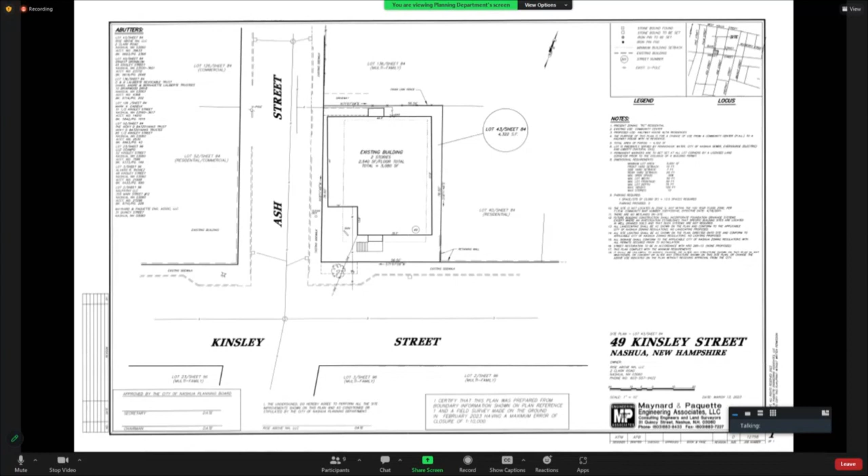I'm Michelle Clark. I run Process Recovery Center in Nashua and Rise Above Sober Living. The plan is a 28-day residential program. It'll be for women, housing up to 15 women. We'll have a clinician on site, a case manager on site, and 2 behavioral health techs during the day. The second shift and third shift will each have 2 behavioral health techs on at all times.

From there, they will transition on to PHP or IOP. So they will still be in the community, but they won't be at 49 Kinsley. There'll be a nurse that comes in and sees them during the day. So they'll have clinical services, case management services, and nursing services.

Questions for the applicant by the board? Ms. Harper: I'm sorry, just to clarify, this would be the initial step in someone's rehabilitation? Absolutely. Okay, thank you. Other questions by the board?

The only step they may do before us is like respite or detox, because we're not going to have a detox or the social aspect of social detoxing like the respite in Nashua. So they may do that first.

Thank you. Other questions by the board for the applicant while we're in the hearing? Mr. Riley: I guess just to follow up on that, then, would you have any state licensure from the Department of Health and Human Services, or are you outside the scope of that?

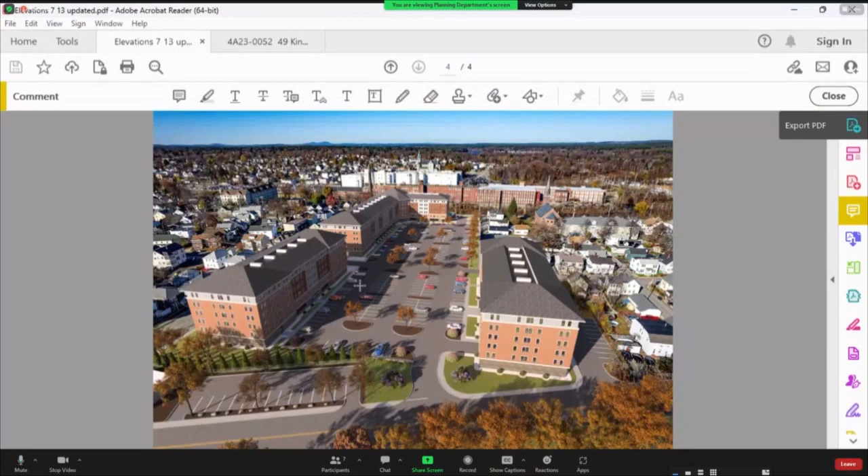I had an aerial photo of just the existing site, but I'm sure you're all familiar with it. So 103 Temple Street, map 37, lot 6. It's about 5.8 acres, located in the general industrial and TOD overlay districts.

Direct abutters, we've got Temple Street, retail uses and railroad property to our north. Spruce Street and residential uses to our west. We've got Scripture Street, Worcester Street, and residential uses to our east.

To the south, we've got Howard Street, St. Mary's Bank, there's a Wendy's, fire station, and city-owned land. Predominantly residential, but there are some mixed uses throughout this area of the city, as this board is well aware.

Existing site is currently developed, so there's a large building complex totaling about 118,000 square feet, mostly one story, but there is a portion of the building that is 3 stories directly adjacent to Scripture Street.

Historically, the site was the location of the J.F. McElwain Shoe Manufacturing Company dating back to the 1920s. Scott, as always, did a fantastic job in outlining some of the historical aspects of the project, including a link to a pretty cool video from 1923 showing the operations back in the 20s.

Current uses on site, there's a mix. We've got a contractor's yard, a kitchen store, a tire repair, sales, church, a shelter, along with the bingo hall. We've got about 2,000 feet of frontage and a total of 8 different curb cuts that go out to the various roads abutting this site. There's also various loading docks and parking areas, some of those directly out into the roadways, and then of course there's a large parking field in the southerly portion of the property adjacent to the bingo hall.

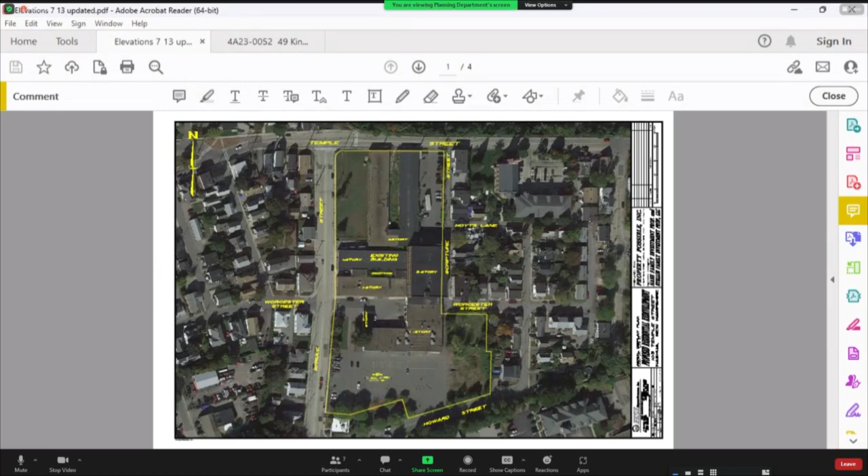Next slide, Scott. Thank you. So it's proposed to demolish the existing buildings on site and then construct the 3 new multifamily buildings, again totaling 362 units. Careful consideration was taken in terms of the layout of the new buildings and parking.

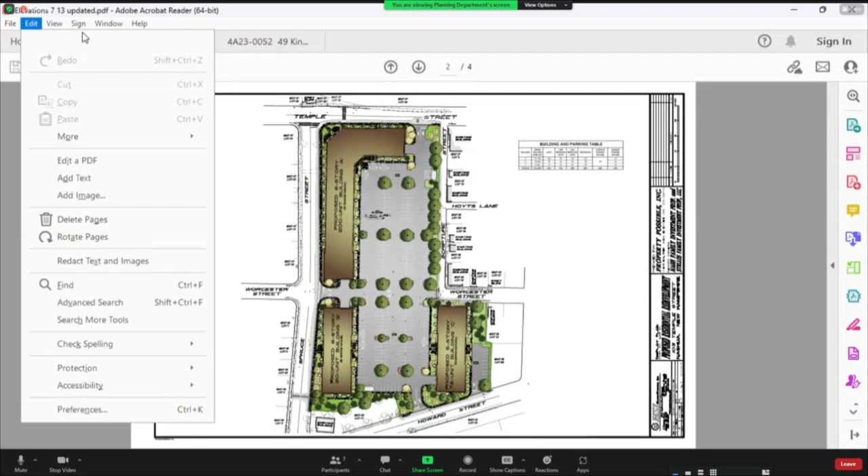One of the goals of the TOD overlay is to create kind of an urban streetscape by placing the buildings up along the main roads with the surface parking kind of either tucked internally to the site or to the rear of the site, with the hope that the buildings are more aesthetically pleasing up along that streetscape.

We also wanted to focus here on providing a little bit more of a landscape buffer along Scripture Street, between our new parking lot and Scripture Street.

If you've been down Scripture Street, it's a pretty narrow alleyway, and it backs directly up against the back of that 3-story section of that old industrial building.

So just a little bit about the buildings themselves. Building A is top left of your plan at the corner of Temple and Spruce. It's a 6-story building totaling 200 units with 92 parking spaces at the ground floor garage level. Building B, moving south, located along Spruce Street, is a 6-story building totaling 72 units, again with 40 garage parking spaces on that ground floor level.

Lastly, Building C, located in the lower right of the plan adjacent to Howard and Worcester Streets, is a 6-story building totaling 90 units with 36 parking spaces.

In terms of unit count, there are 134 one-bedroom units, as well as 228 two-bedroom units. It's about a 1/3, 2/3 mix. And of course, the project will comply with the city's inclusionary housing ordinance, which requires a minimum of 20% of the units to be affordable, which in this case equates to 72 units.

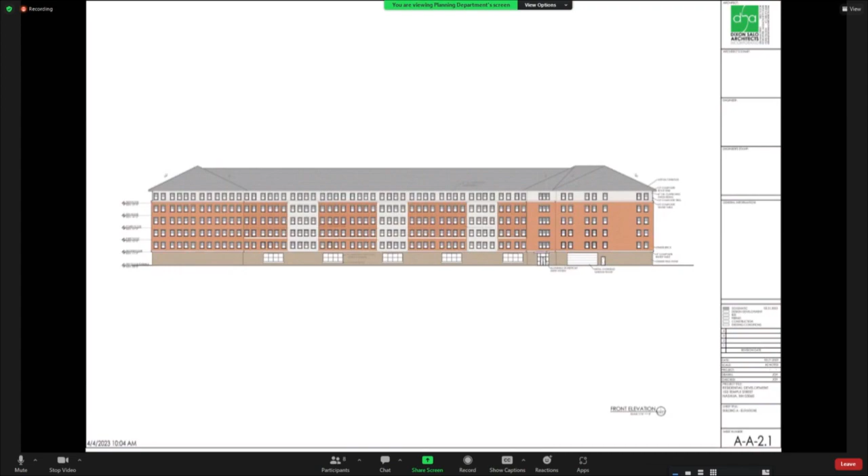Access to the site will be provided via 4 curb cuts. Scott, if you could go back to the, yep, thank you. 1 onto Temple Street to the north, 1 onto Spruce Street to the west, and 2 onto Howard Street to the south, again consolidating 8 existing curb cuts into 4. An additional driveway connection is proposed to the corner of Worcester Street and Scripture Street to the east, but that is to be gated and used for emergency access purposes only.

Additional site improvements include curbing, sidewalks, signage, landscaping, site lighting, utility services, and stormwater management. So speaking of stormwater, the existing site is fully developed. It's got about 78% impervious cover without any formal treatment practices on site. This portion of the city is all combined sewer. There's no separated drainage and sanitary sewer. So the drainage from this site just dumps right into that combined system.

So for that reason and many others, this project really provides a significant opportunity to improve stormwater both from a quality and quantity perspective. The proposed redevelopment project has about the same amount of impervious surface compared to the existing condition. So runoff from the new building and parking areas will be captured via curbing, catch basins, and roof drains and piped into one of 3 subsurface infiltration systems located underneath the parking lot on site. Systems will take advantage of favorable soil conditions, so we've got generally sandy soils and deep depths to groundwater.

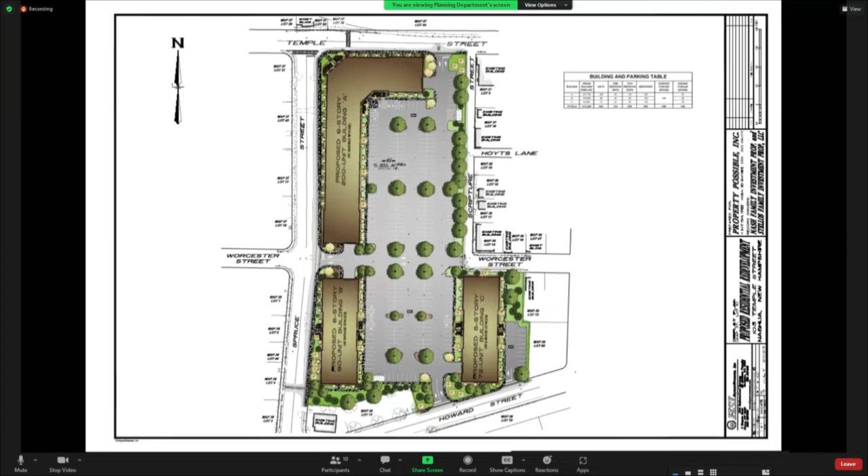Thank you. Just the bank is staying, right? The bank is staying, the bank is on its own property there. The Spruce Street connector improvements would really need to go across their property, but again within the right of way, so the bank is staying, that's a separate property. Okay, thank you.

Okay, so for the board, any further questions of the applicant or staff while we are in the hearing? Okay, hearing none, I'm going to go ahead and close the hearing now and move into the meeting.

Okay, so just a few comments from myself. Certainly a reasonable size development with regard to the purpose of the project, with the inclusionary zoning taken in place, it certainly feels very consistent with the master plan of the city that I was involved with. So I feel like that box is checked pretty well by this project. It does foster the Spruce Street connector work and the connections to the Riverwalk, which are all kind of future and partially underway, but I think the ability to coordinate this with that—without this development, those projects probably are not as successful. So I think this helps to move that further down the road. So that's a couple of my comments.

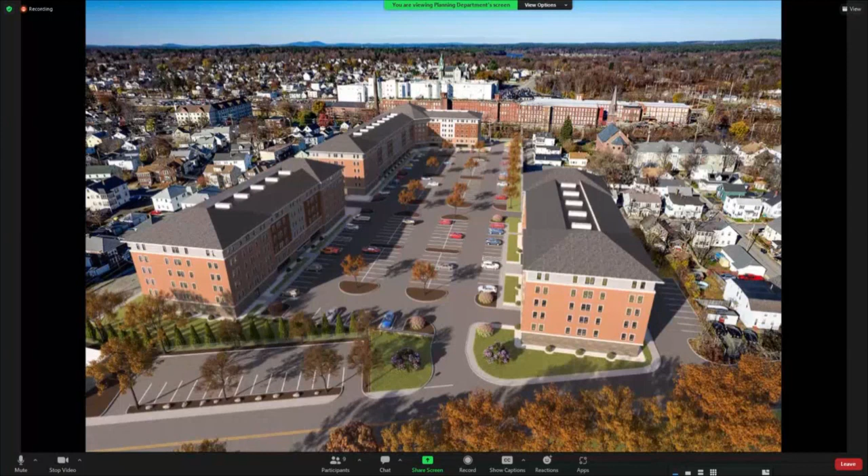All right, so the only thing we have left on our agenda here is a review of our tentative agenda. Has anybody had a chance to take a look at it? I don't see a link in the agenda. To summarize, there are no potential DRI applications coming down the pipe in terms of our tentative agenda. So we'll punt that to the next meeting at this point, understanding that we don't have any actions we need to take right away.

And then I will just open up any discussion items by anybody here. Alderman Klee? Thank you. I do love the new agenda and how things are going, but I have to tell you, I did have to have some things printed out, and I should have had more printed out. I cannot open a lot of these files on my iPad. They start to open up, and then it says that this link is not acceptable and so on. I did make a copy of it just to let you know. So I do have issues with the iPad. I could end up bringing my laptop here, but then I'm going to have plugging in issues.

It's likely a size issue with the files, particularly with the Temple Street one. Anytime you have a large project over an area, you have match lines, so the file size becomes large. I jumped onto Zoom so I could see the items. Yeah, they all seem to work, because I've been flicking through them at the meeting, but with the iPad, I just can't do it with the city iPad. Okay, well, we'll keep working on that.